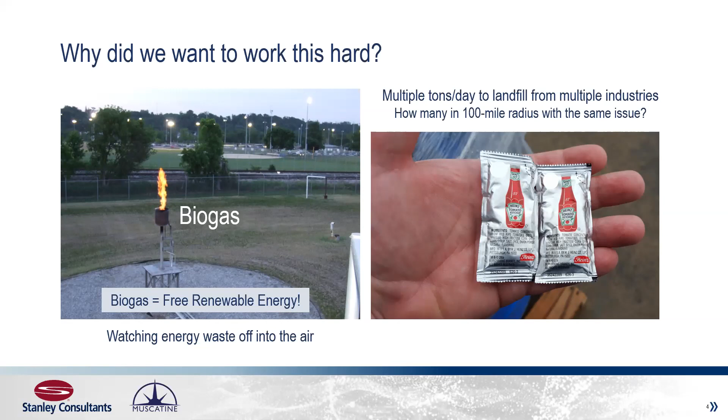So we said, what are we going to do with this stuff, and how are we going to convert this into energy and make more gas? Because little Muscatine really wasn't making enough gas to entice anybody to run an energy program, and we didn't have any money or grants for that. So we needed more gas to generate private funds for a program like this. Back in 2012 or so, renewable natural gas for vehicle fuel was all the rage, and natural gas was going to be the cure for our climate woes. That's kind of where we were headed at first.

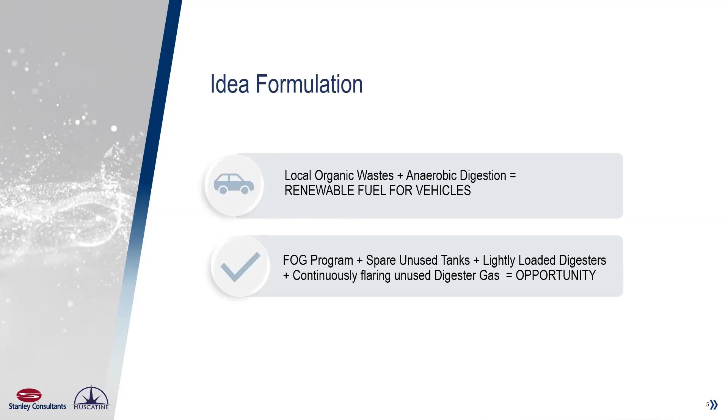We had a lot of things set up already. We had a FOG program, and some spare infrastructure we could use. Our digesters were really lightly loaded, running 45 days. So we thought we had lots of capacity, and the flaring told us we had a lot of opportunity here, but we needed more gas. So where do we find the fuel for our digesters?

It turns out food waste was a really key target for us here in the Midwest, particularly where we have a lot of food manufacturers and organic waste. So we said, let's find that 40% of food that isn't eaten, all that waste going into landfills, and take it into the plant to convert it. There are some places doing this on the coasts, in New York, California, and elsewhere, but not a lot was happening in the Midwest, so we had to look around and find where we were going to get our new fuel for the digesters.

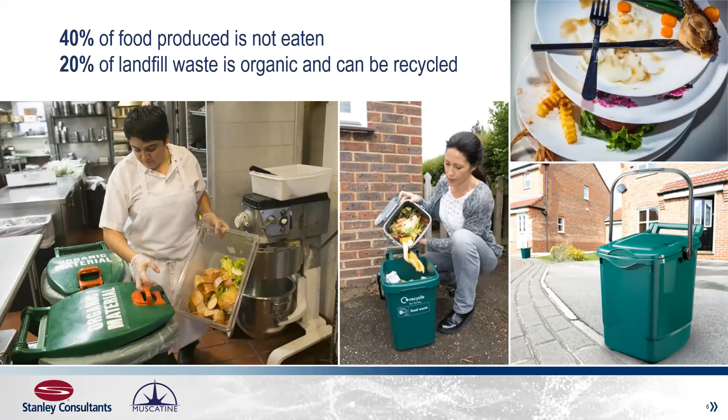So we used the EPA's food recovery hierarchy, as you see here, in building our program, asking what do we do since we're only the fourth best option for this food waste. When it says MARRVE up there, that's Turn Food Waste into Energy -- actually the Muscatine Area Resource Recovery for Vehicles and Energy program that we started. It actually targets all three of those higher options first before we get to the industrial side, but of course we're focusing on the industrial side today. That's kind of where we are since we discovered this massive amount of food waste out in our communities and our region.

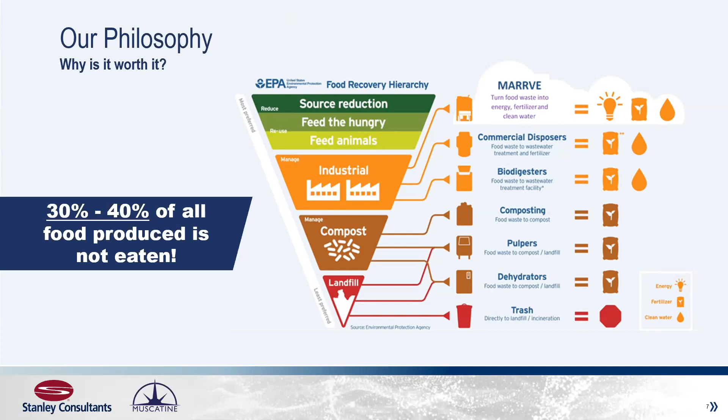So Muscatine is building our sustainability efforts here. We have a program where sustainability drives our programs in the right direction, linking the three aspects of sustainability -- people, planet, and prosperity -- to find those key projects. And the project we did focuses in on that so well. It's just a perfect match for all of these things.

And the community really embraced it. I went through about four iterations of proposing this to city councils, telling them it wasn't a guarantee of any kind, and they still said, we want to go for it, we want to be that kind of a community. That really speaks to our level of appreciation for sustainability in our community.

There's lots of benefits to this, and this is how we sold it to the council. Diverting landfill space -- since we're a regional facility, we're not just saving space in our own Muscatine County landfill, but landfills around the region where all this material was going. When you do that, you lower emissions from those landfills, since even gas-capturing landfills are generally pretty inefficient at it. So the more organic waste you take out of a landfill, the better for methane emissions. Of course, this is also a good service for our community, since there was a lot of need and requests for this kind of service that wasn't being met.

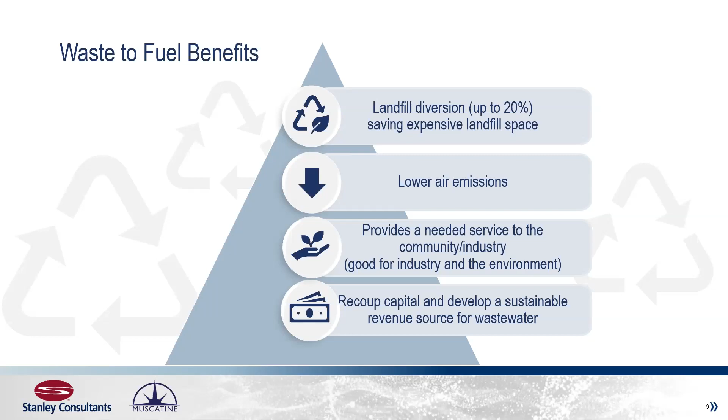So again, when we first started looking at this, renewable natural gas was all the rage. The renewable energy credits you could get when injecting it into the pipeline were really touted. There were huge advances in renewable natural gas and CNG vehicle engines, and that was kind of where everybody thought we were going to be going. Of course, I think we've shifted from that a little bit, but this is where we started.

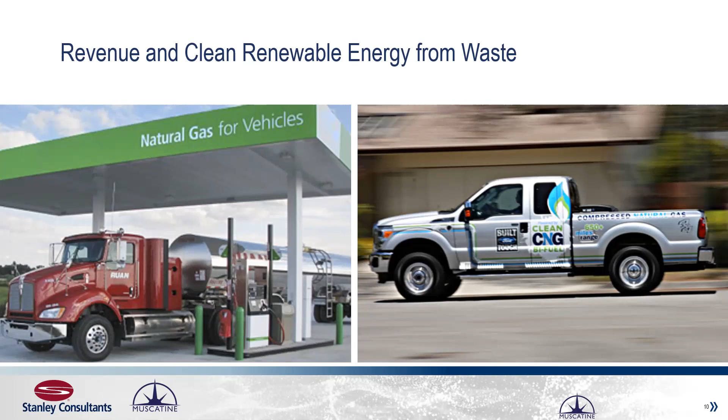Once we figured out that vehicles were not going to be all natural gas, that they were actually going to be electric, we said, well, what are we going to do with our gas, since we want to get it into vehicle fuel and energy, since that is how we generate the renewable energy credits for the revenue we needed to make this project worthwhile. So the CNG delivery mode was kind of pushed.

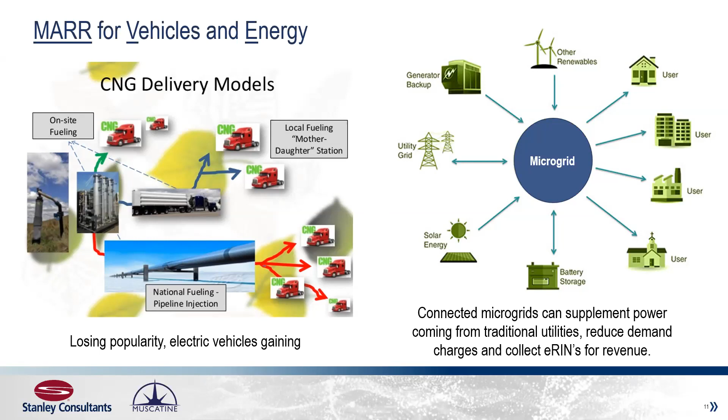Now we're looking toward the microgrid scenario you see here, where we can generate power, store it, and push it back into the utility grid to realize what hopefully will become an e-RIN. If you know what RINs are, they're renewable energy credits you can sell on the open market. They promise us an electric RIN is coming—it's been available since 2007, but none have been issued by the EPA. They're working toward that now, so hopefully it becomes a reality soon.

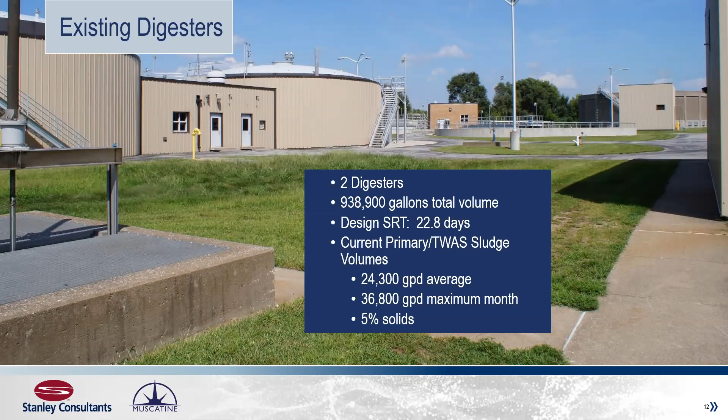They receive a mixture of primary and thickened waste activated sludges, about 24,000 gallons per day average and about 37,000 gallons per day max month, at about 5% solids for those feedstocks. At the time of the initial studies, the city was taking in about 16,000 gallons per day of FOG and high strength waste, processing it through the liquid train, which isn't really ideal for handling concentrated feedstocks. They were getting a gas yield of about 56,000 cubic feet per day average, though with a lot of variability, equating to about 14 cubic feet per pound of volatile solids destroyed.

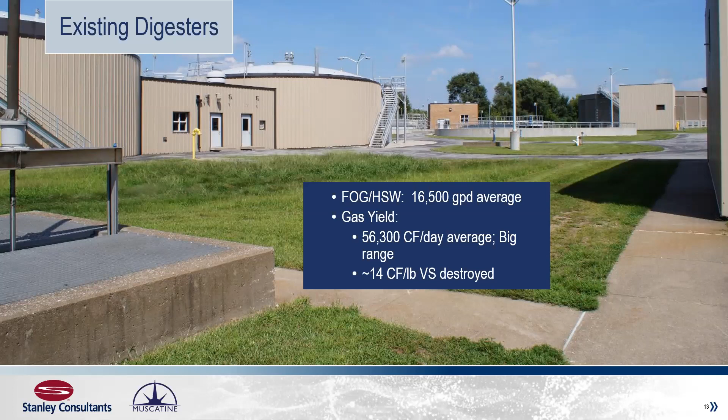The facility also has 4 older idle digesters that are part of a conversion. This used to be a pure oxygen plant back in the 70s. In the 80s, the loads went away and they converted it to aerated activated sludge. When they did that, because of the drop in loading, they were also able to idle a sizable part of the aeration basin and partition part of it into 4 rectangular digesters. They need rehabilitation work, but that's another 2 million gallons of potential digestion capacity available.

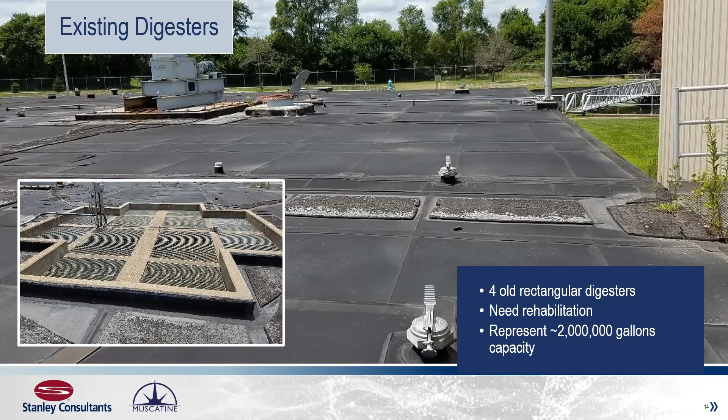Looking at the plant itself, energy use and biogas production at the time: 30,000 cubic feet per day average would meet the digestion, building, and process heating demand, with a peak of about 80,000 cubic feet per day needed. This is equivalent to heating about 90 homes per year. In winter we have a lot of demand for biogas for process and digester building heating, but in summer that demand drops way off—everything's warmer—so we accumulate quite a bit of gas during summer months, and it's all flared off currently.

Natural gas usage was about 3,650 therms average per month, with a peak of over 8,000 therms per month, and a pretty substantial cost of $3,300 per month, rising to about $7,000 during peak winter months. And that was back in the good old days when gas was below $3.50 a therm—whereas it's about $7.90 today on the spot market.

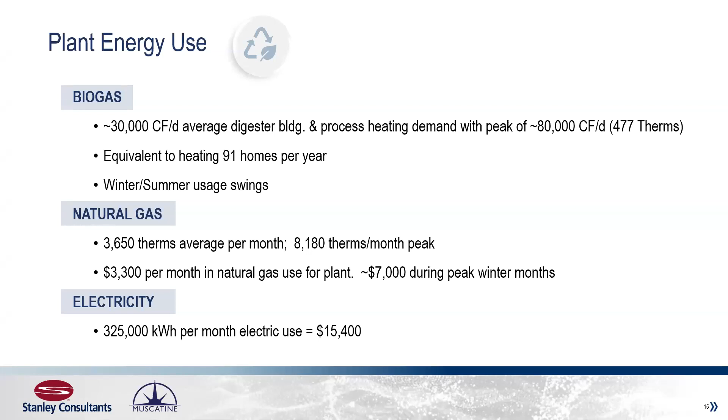Electricity usage was about 325,000 kilowatt hours per month, costing about $15,000 in electric usage per month.

Feedstocks: when we start thinking about co-digestion and biogas generation, what kind of feedstocks can we bring in? We want concentrated, ideally liquid material free of debris. The city also has a FOG program for restaurants, delicatessens, bakeries, and any place using a lot of fats, oils, and greases in cooking. They wanted to be sustainable and provide that service to local restaurant establishments, so that was one of the key targets for this program. Then there's liquid organic waste, which can be a number of different things.

A lot of liquid waste comes from food processing, but we also get solid organic waste, as John was talking about - ketchup bottles, ketchup packets. There's all kinds of organic material that is packaged but eventually not used for its intended purpose, and it ends up in the landfill. Past-prime vegetables, expired produce, expired canned goods from grocery stores, cafeteria waste from schools - these are all examples of organic materials that can be recovered and actually slurried and digested.

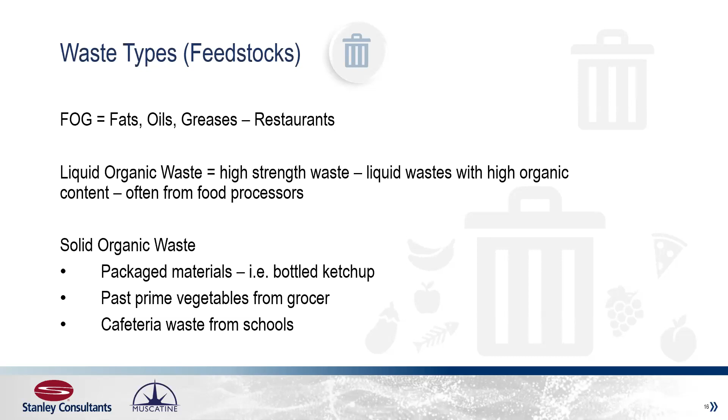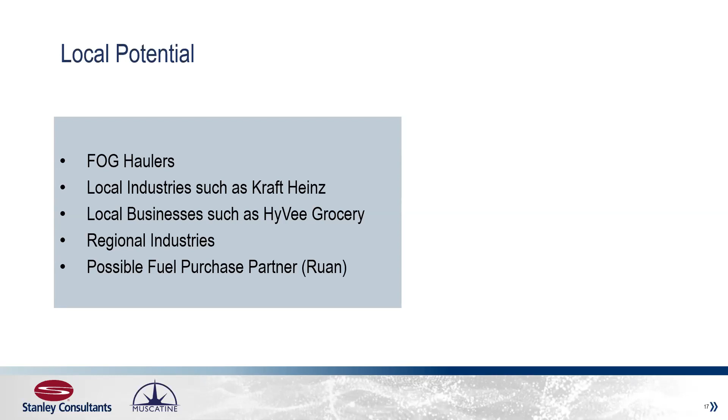So we look at the local potential - the fog haulers, local industries such as Kraft Heinz that John mentioned, local businesses such as our grocery store chains in the area. Hy-Vee is one of the big ones. Regional industries too. And as John alluded to, we're thinking we'll use this for compressed natural gas for vehicles. So we're looking at how we can use that readily - Ruan, a trucking company, has quite a fleet of compressed natural gas trucks and would be a potential partner to participate in this.

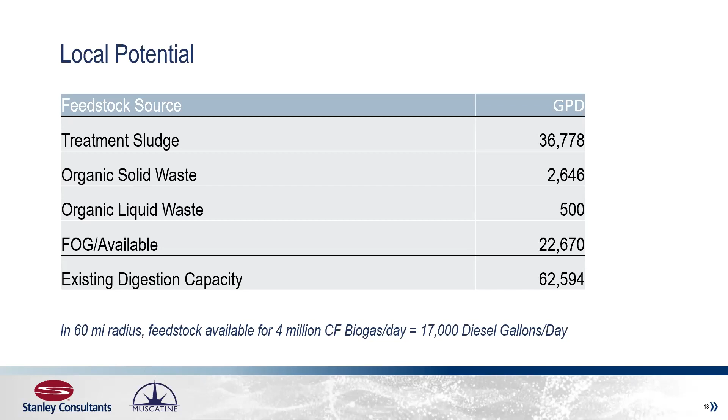So we look at our feedstock sources and our potential usage or availability of capacity. Treatment sludge, we talked about that already, is 37,000 gallons per day maximum month. At the time of the initial studies, the organic solid waste, or total organics, was about 3,000 gallons per day. And then fog and available capacity that we'd need to reach full digestion capacity in the two newer digesters is about 23,000 gallons per day.

So we embarked with the city and a sub-consultant, Eco Engineers, on a biogas waste shed study. That's looking at what kind of organic feedstocks are available within a 60-mile radius. That encompasses quite a number of industries, including ethanol and biodiesel industry, a lot of food manufacturing as John talked about, and the material that goes to landfilling that we identify as organic.

So this kind of breaks up some of the different sources. If we were able to capture and process all of the organic substrates within an hour of Muscatine, we could produce 4 million cubic feet of biogas a day, which would be 17,000 gallons of diesel equivalent per day. Obviously we're not going to capture and process all of that, but it gives you a sense of the scale of material that's out there.

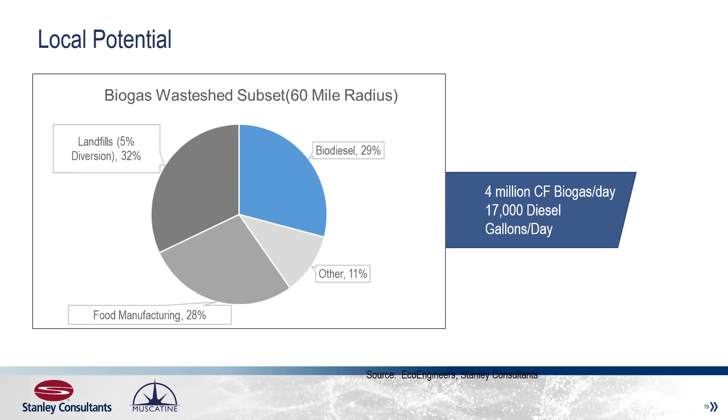So as we embarked on our study, we looked at low, medium, and high scenarios so we could start looking at risk and risk-reward possibilities. This is just looking at feedstock coming in - how much could we capture, how much could we process, variability in biogas production, and what kind of cubic feet per day of biogas we could produce.

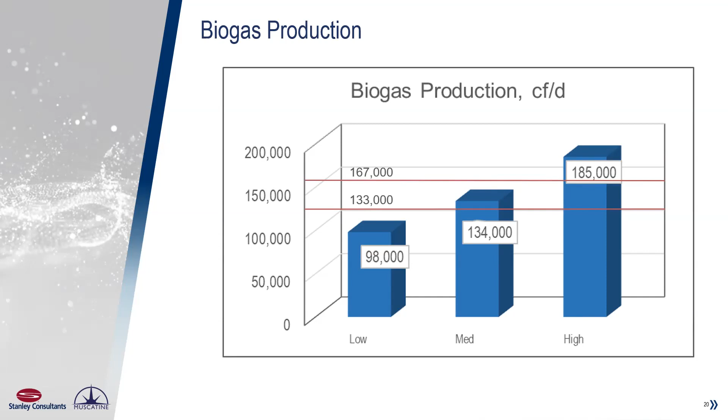On the low end, we're looking at about 98,000 cubic feet per day, and at the high end, about 185,000 cubic feet per day. The two red lines across the front of that graph, at 133,000 and 167,000 cubic feet per day, represent what the plant is currently achieving with co-digestion and the organic feedstocks they're bringing in.

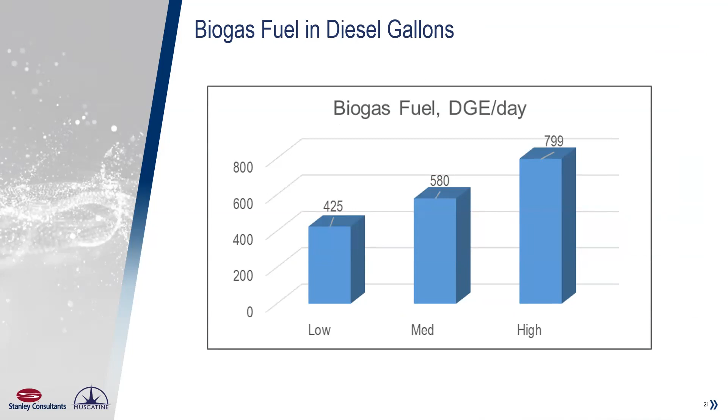Thinking in terms of vehicle fuel, we converted that to diesel gallon equivalents. This is 425 to almost 800 gallons per day, which doesn't seem like a lot until you start aggregating that over a year. As you aggregate that over a year, it becomes a pretty significant amount of fuel - 150,000 to almost 300,000 gallons of diesel a year.

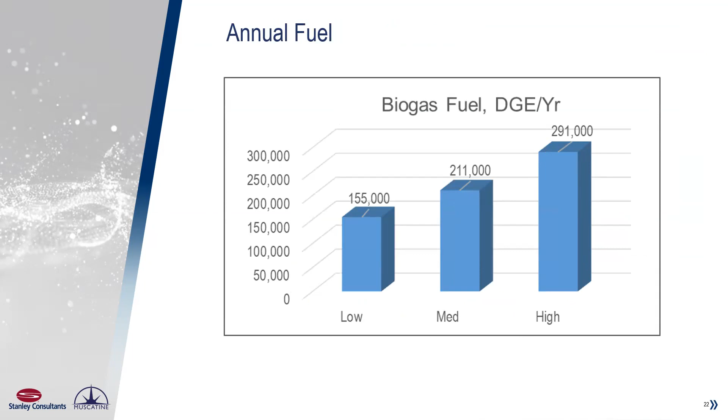We looked at a number of different ways of utilizing biogas at the facility. One was direct firing in the building furnaces - treating the gas and then piping it, which requires some additional gas infrastructure, a fairly low capital cost investment. Another is cogeneration of heat and electric power, which has been practiced at anaerobic digestion facilities across the country for many years. It's hard to make it all work number-wise from a capital and operational cost perspective, but when you start factoring in renewable energy credits, that starts paying down the capital cost and making it pretty attractive.

As John indicated, now we're thinking about microgrid management and these e-RINs, the electric power renewable energy credits that we hope to see come out of the EPA soon. And then compressed natural gas for vehicle fuels, that was number 3.

The concern there, of course, is we produce this gas and have to store it for some period of time before it's put into vehicles for use. So how do you manage that inventory of compressed natural gas?

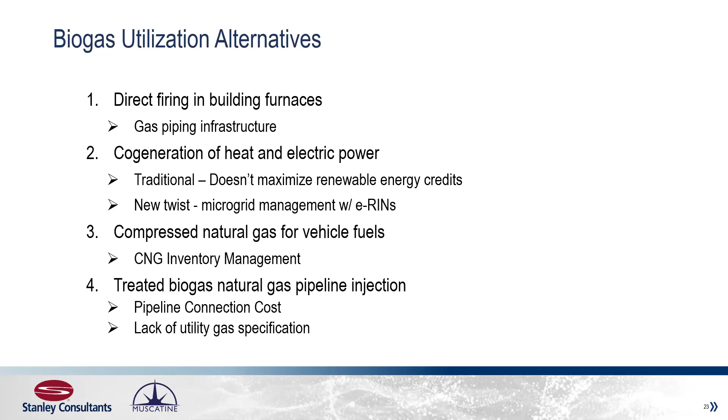So us being engineers, we figured the numbers, we estimated capital costs, we estimated annual costs, savings and revenues, and kind of looked at a 10-year present worth cost. Out of these different options, the compressed natural gas for fuels really was the one that would show a positive when all the numbers were assembled.

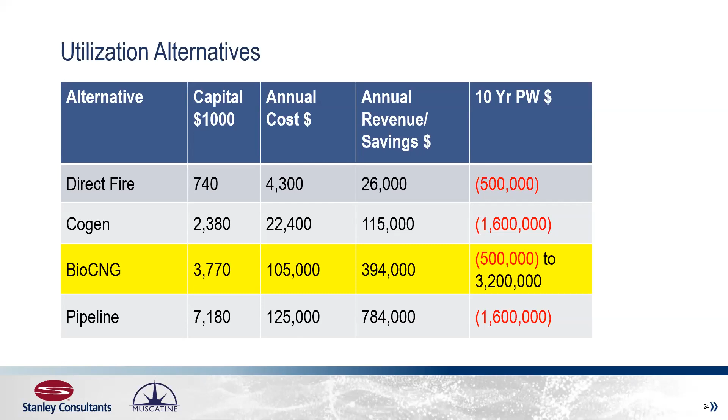So looking at the overall estimated cost, the phase 1 receiving facilities that we're really going to focus on today, that was estimated at $2.5 to $3 million. The phase 2 digester renovation was $1.6 million, and then the bio-CNG vehicle fueling facility was estimated at $2.5 to $3 million. And then we have operating costs that we also estimated for the study work.

For the phase 1 receiving, which is really the focus, we were looking at $60,000 to $90,000 a year in operational cost.

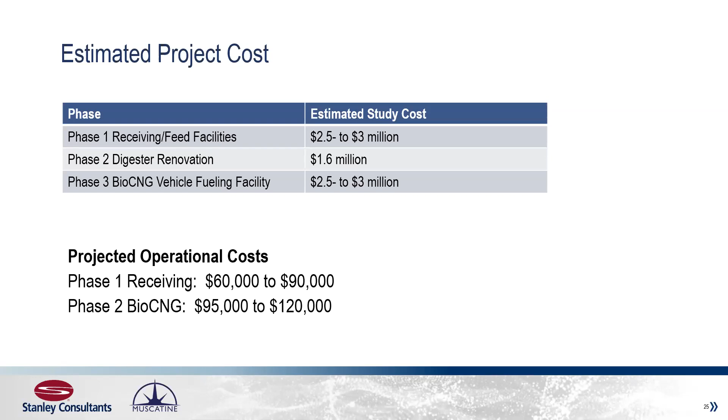And we look at potential revenues for the project. Tipping fees is an important aspect of this, and actually the phase 1 receiving facilities, our efforts looking at that from a return on investment standpoint was really focused on just funding out of tipping fees, because we weren't sure if and when the biogas utilization component would be capitalized and funded and then implemented.

But then moving forward, if we take and use that biogas that we're producing, we have a fuel value. And then we also have these renewable energy credits. Basically petroleum producers are paying dollars to get these offset credits. It's a federal program, but if you can get into the pipeline and call it transportation related, then you can get other states participating and kind of stack these credits, and it can be a substantial revenue stream.

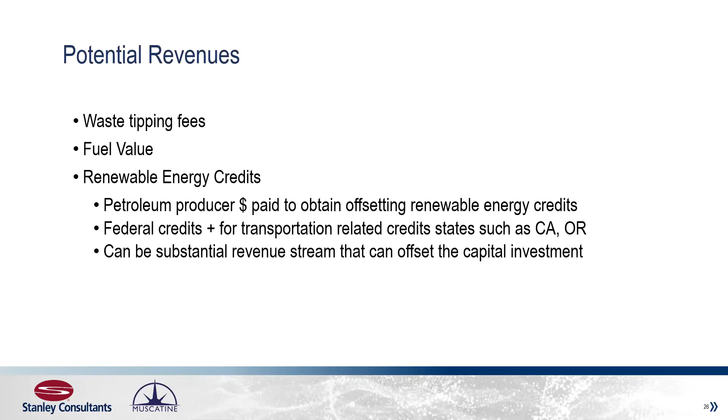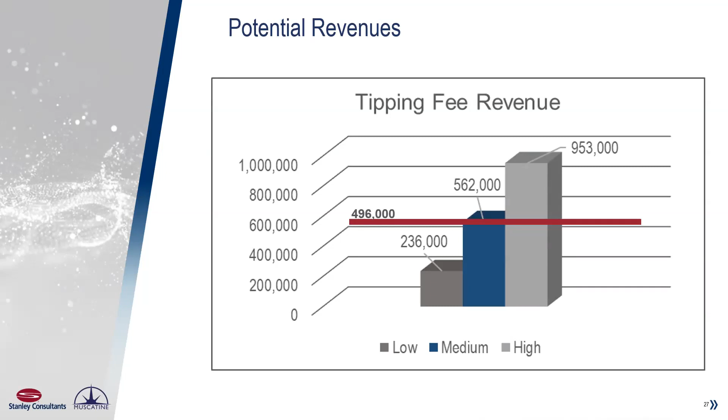Okay, so this is talking about tipping fee revenues. What we're looking at here is a low of about 230,000 to a high of 950,000 based on the volumes that were anticipated. Currently the plant, as of this last year, was bringing in close to $500,000 a year in tipping fee revenue. So that's kind of right there at that medium category for the scenarios.

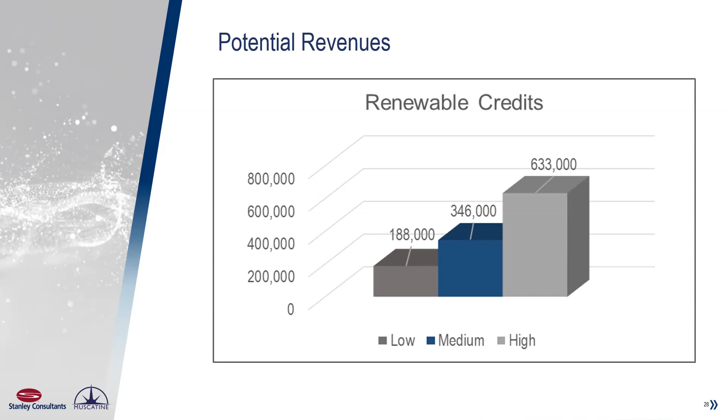This is just looking at the renewable credit dollars. We're not going to dwell on that a lot, but it does illustrate that there's some substantial dollars there. They are variable, which we will talk briefly about.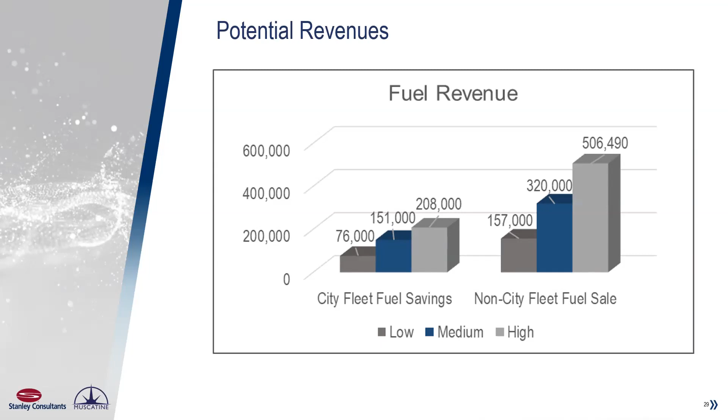And then we stack all that together, and you can see that the total revenues could be pretty substantial if the project was implemented to all three phases, the biogas was being beneficially reused, and we were getting renewable energy credits.

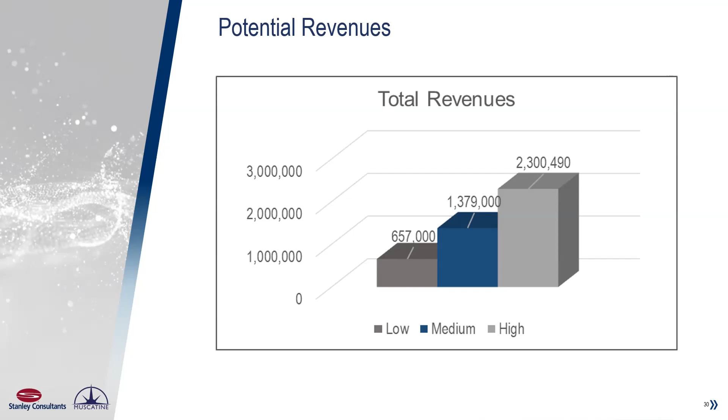So we kind of looked at what kind of rate of return are we looking at for this municipality that's looking at this. Their timelines and time horizons are a little longer, but they don't want to end up investing in something where the equipment's going to wear out before they get some type of return.

So we did a low, medium, and high, and really looked at phase 1 and 2 for the utilization. As you can see, the high and the medium delivered under 10 years, which is kind of a marker that we're shooting for. But even the low end, we're delivering in under 20 years, theoretically, before equipment would wear out.

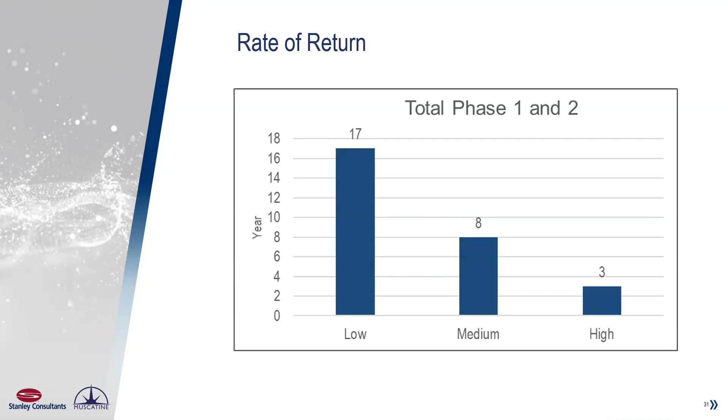So I wanted to speak briefly about some of the risks associated with a project like this, and we have to recognize and consider that in our thinking. One risk is that you may not capture the organic waste volumes you thought you were going to capture. That hasn't been the case for Muscatine, but as competition perhaps blossoms and other entities embark on this type of endeavor, there may be competition for that organic feedstock, so you could see lower volumes in the future.

On the fuel side, for compressed natural gas vehicle fueling, what happens if we don't have the type of fuel consumption and sales we were anticipating? And then for our tipping fee rates, we set a tipping fee kind of associated with the solid waste tipping fee, but if we have competition from other facilities for these same feedstocks, perhaps our tipping fee rates would drop and that revenue would decline.

And then the renewable energy credits - what is that value? That value fluctuates, it's a marketplace, and those values can be phased out. Also, it's a government program, so government programs do sometimes end. So there's some risk associated with fully relying on those RIN values.

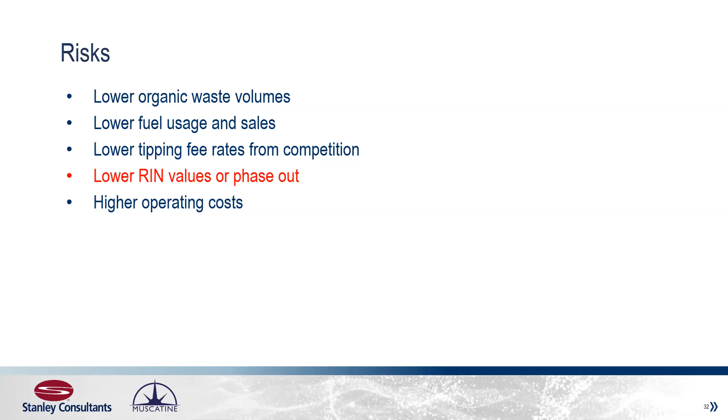So I'm going to turn back over to John. He's going to talk about some of the exploration part of our project.

So this is the fun part. When we started looking at all the food waste that was in the area, we said, well, what are we going to do with this? How do we get the ketchup out of the packet, as it were? So we started looking around, and I had a guy in the back who vended - he had the Muffin Monster contract for Iowa. So I said, can you bring me a Muffin Monster? We're going to set it up sideways, and I'm going to start dumping stuff through it to see what happens.

So we had it set up on an old pump pedestal, and we started throwing things through it. We actually put several screens on the bottom to see if we could capture that trash and organics coming out the bottom. These are the kind of things we did when we first started out, just to see what would happen and start exploring those alternatives.

But of course, that's a pretty inefficient way to do it. This is a much more efficient way to do it, with the turbo separator from Scott Equipment. There are several manufacturers of depackaging equipment out in the world - most of them are made in Europe. This one actually happens to be made in New Prague, Minnesota. So being in Iowa, we really liked that they were close. They're a Midwest company, and they're an American company as well, so for parts and things like that, we were really excited about that opportunity.

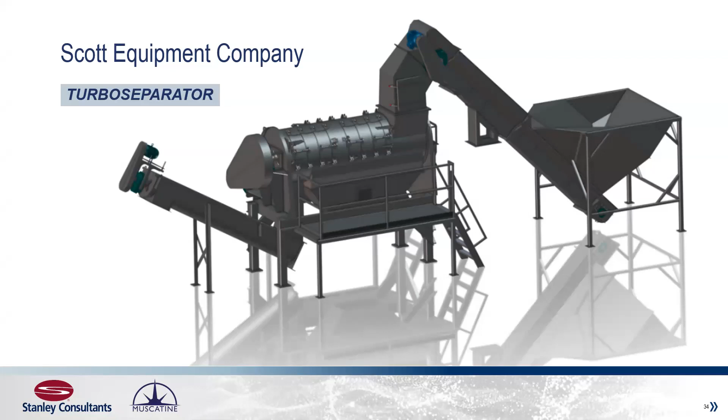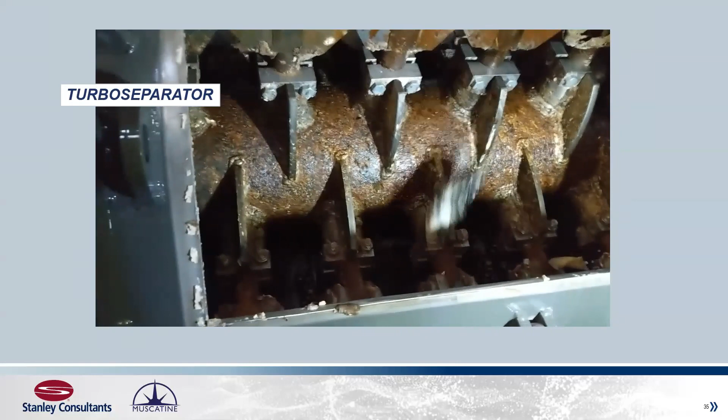So this is what one of those looks like on the inside. If we look at the barrel part of it, it's basically a hammer mill operation where you see the shaft with the paddles attached, and those paddles can be angled in certain directions depending on the product you're running - you can change those. If you want to keep the material in the machine longer, you angle them straight; if you want it to go through faster, you angle them more to get that desired result. These will actually rotate at about 400 to 800 RPM.

This is typical material that we get - canned products. That's the cans as they show up at our plant, that's the material being dumped, the organic that was inside the can. And then the can itself looks like it's kind of just a mangled piece of aluminum - it's not shredded, not chewed up, but just kind of mangled a little bit there. But that's still very recyclable material in that form, so we try to do that as much as possible - recycle the packaging as well.

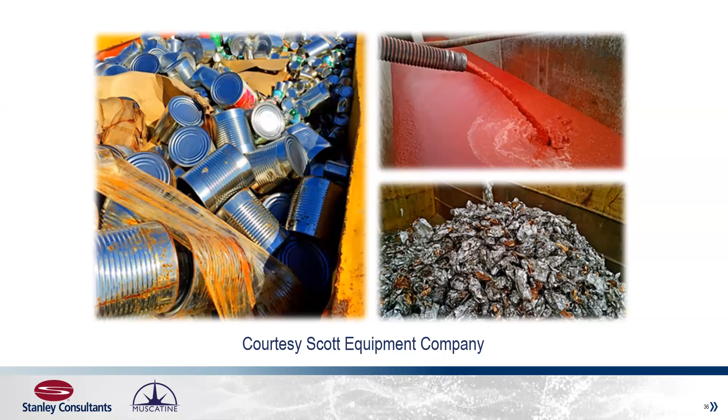As we explored and looked at model facilities, which there are very few of across countries, we started contemplating what it would look like here at the Muscatine Water and Resource Recovery Facility.

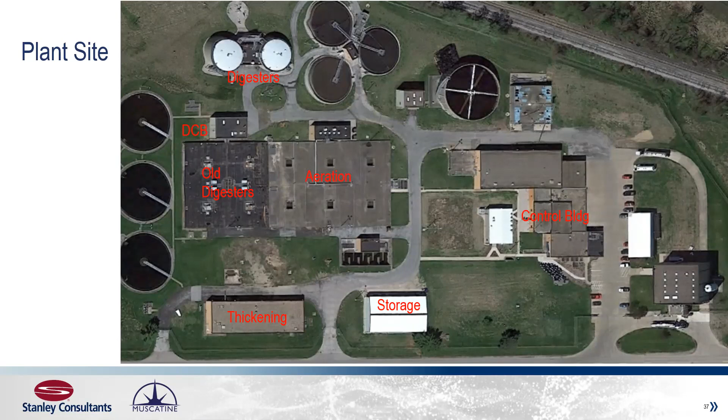We first conceptualized what we needed to do here to receive these organic wastes. We were looking at the area just south of the idle digesters for that proposed receiving facility. The initial thinking was, hey, we've got a once-through drive with two entrances, an entrance and an exit, and we could site it there, and everything would work great. We'd have some area for paving to back into our tipping floor.

We want to manage this material so we don't disrupt our anaerobic digestion process. So we need to inventory our feedstocks, homogenize it, and meter it into the anaerobic digesters to minimize disruption of the digestion process itself. So this was kind of our initial layout.

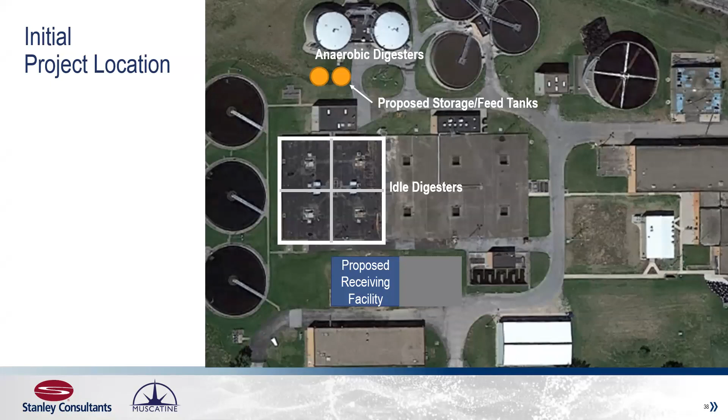We developed a receiving building concept here. This is just a rendering of what that looked like. We had a layout where we took our liquid waste receiving from the trucks driving by off the bottom of the page—they'd hook in, discharge their load, go through a rock trap, a bar screen, and into a pump well basically below the turbo separator. That's the big circle, the pump well.

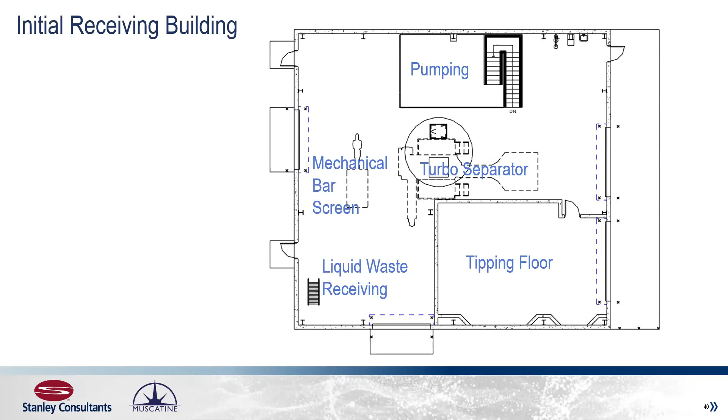And then we could pump out of that to another area of the plant for inventory management. The tipping floor was where we were envisioning bringing in the containerized organic waste, the cafeteria waste, etc., to run it through the turbo separator.

This is a cutaway illustrating some of the facets of that building. Here you have the two feedstock inventory management tanks, the high strength waste storage tanks, and associated pumps and piping for keeping them warm, keeping them mixed, and metering them into the digester.

Some of the challenges of this project include the limited number of comparable facilities. John went and looked at quite a number of them across the country. There are very few that are actually doing decontainerizing. There's a lot of folks taking FOG or liquid waste, but not very many doing the decontainerizing work that Muscatine is doing.

Some of the concerns, of course, are the logistics and the trucking. For the truck folks, time is money. So they want to be able to get into a facility, unload, and get out. If you have lots of trucks waiting in line, a slow process to get unloaded, that type of thing, they might lose interest in your facility.

And then how do you right-size this? How many trucks are we going to get of material a day? How are we going to stage that material? What size tank should we have? What's our peak truck traffic day versus average truck traffic? It's a lot to consider.

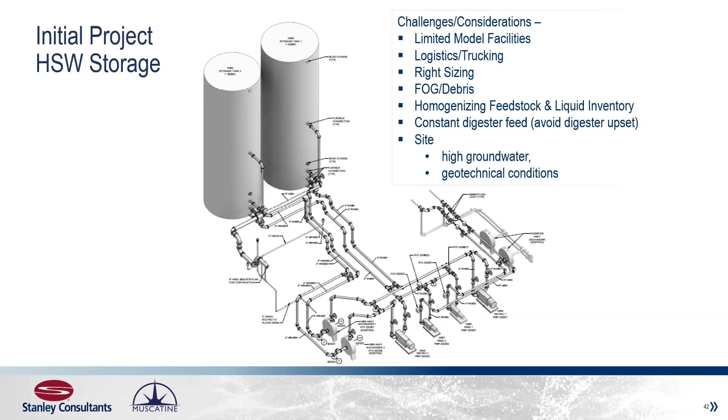So we changed some things around from our initial concepts. We had a high estimated cost for that approach, along with concerns about how to handle truck traffic and what happens if we need to expand utilities in the area. As a result, we ended up changing the location. We eliminated the new storage tanks, repurposed an idle tank on site, and looked at using the existing storage building.

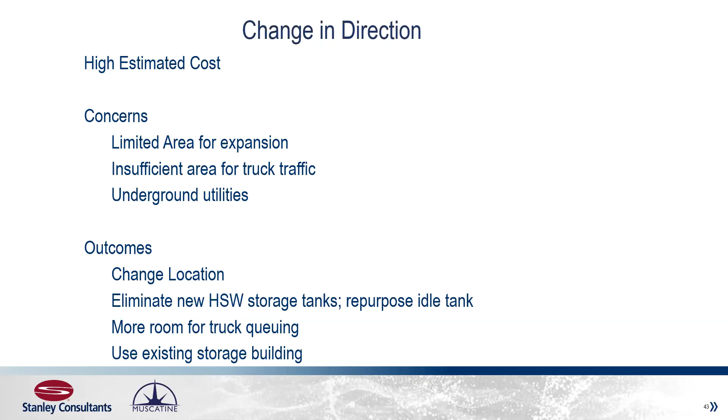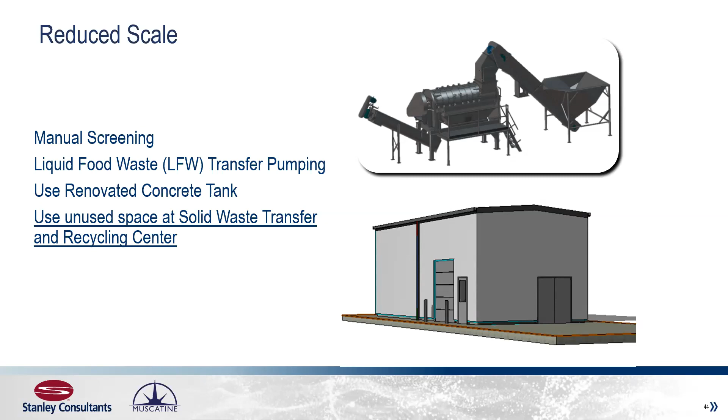That has really been a silver bullet, silver lining to the clouds, so to speak, for us, because it's ideally suited. Here's the transfer station itself, and on the left-hand side where that MORC sign is, that orange sign, that's actually the recycling portion of this facility, and it's ideally situated.

We have loading docks here on the left-hand side of the picture where we can bring containerized organic waste in. We have a drive-through bay at the top of the screen so we can bring our liquid haul trucks in. This is how we oriented and organized this for the city, with the turbo separator there in the middle, and then a tipping floor with a push wall so they could bring in cafeteria waste and other types where it's easier just to dump it and scoop it into that auger in the middle of the screen and auger it up into the turbo separator.

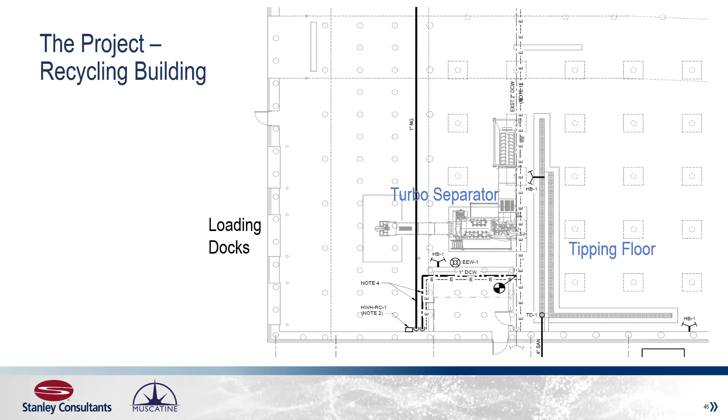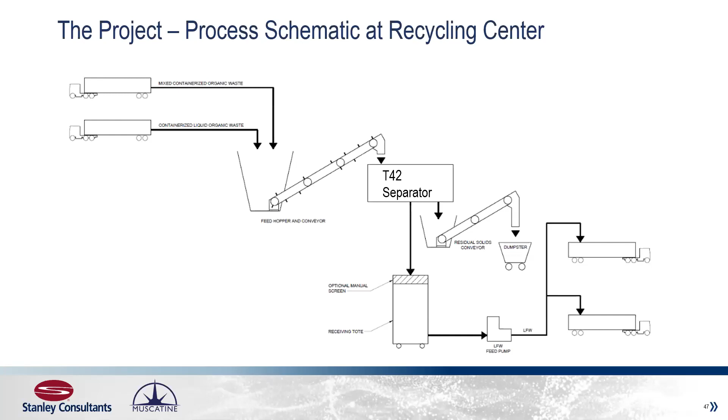So this is just a quick little schematic of the process. We get our material in by truck, put it into the feed hopper, it goes up the conveyor into the separator, and then we have our residual materials that come out in a residual auger that ends up in a bin or a dumpster. And the liquid gold, the organic goo as I like to call it, comes out and drops into this receiving tote. We can do some screening there if need be. We pump out of that tote into tanker trucks to haul over to the water and resource recovery facility.

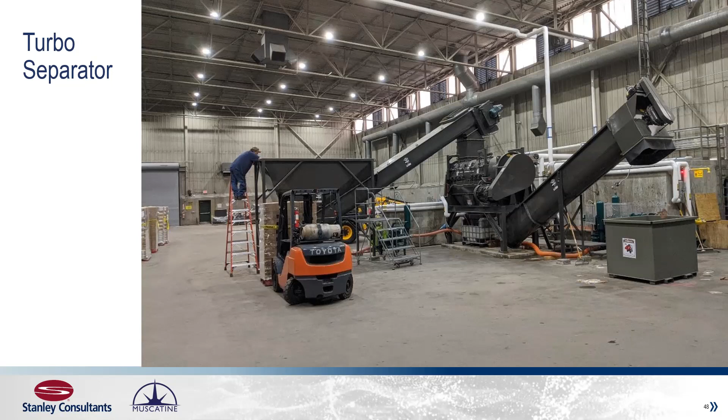Yeah, we can go next. So this is an example of some of the material showing up — in the upper left-hand corner, all those tiny cans are little cans of Vienna sausage made by a local manufacturer not too far from here. They send them to us without even a label on them. They just separate it out by a hardwood flat, and our staff dumps them on the floor, and we use our end loader to scoop them up and run them through the machine. So those are one of those opportunities where we have to actually capture the packaging for recycling as well.

It's really kind of a neat concept. Below that you see the lunch meat you've probably seen in local grocery stores. We have a large Oscar Mayer plant just north of us that makes all this shaved meat. It ends up sitting in a warehouse too long, or they found something wrong with it in quality control, and they can't sell it — it can't be used for human consumption. So they bring it to us, and you can see the machine — that's after it's been depackaged. That packaging is not destroyed at all. It's just opened up, the meat comes out, and the machine works excellently with material like that.

Next to that is dog food. We have several large pet food manufacturers in the area as well, and they get stuff that's wrong with that material. I don't know, they find metal in some of the batches, and so they just say, hey, we can't sell any of this to protect the pets. So they say it's better for us just to take out entire yards of this stuff, and we end up with truckloads of palletized and packaged dog food and other snacks.

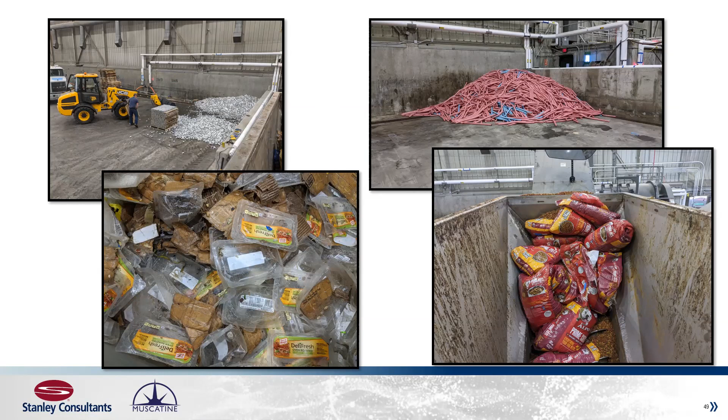So here's a little video showing how the material really works through the machine. It's kind of a fascinating procedure. This was one of our first weeks in operation.

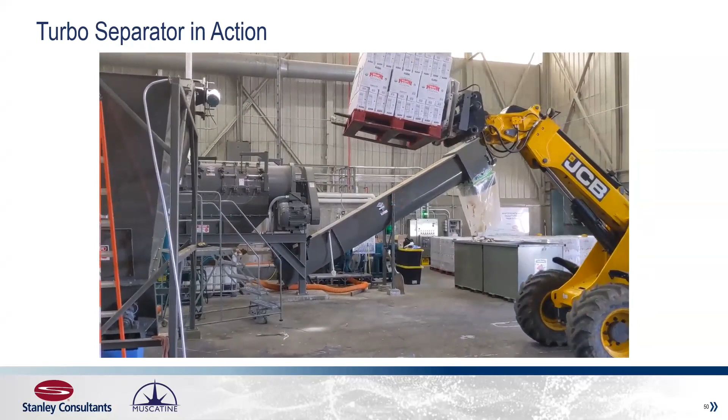So our lift operator here is going really, really carefully and slow. These guys work much quicker now than they did when they first started, because this was all kind of new for everybody. Nobody really knew how this was going to work or how it actually operates.

But we found the equipment that we needed. We found the rotating fork mechanisms and everything else we needed to facilitate getting that material up and into that hopper, and it's kind of some unique stuff that is out there for that. The telescoping arm on the end loader was really key for us as well, instead of just a straight end loader, so that we can maneuver that around to grab other things and use it actually as a platform to work on the machine as well. So there was a lot of advantages to that.

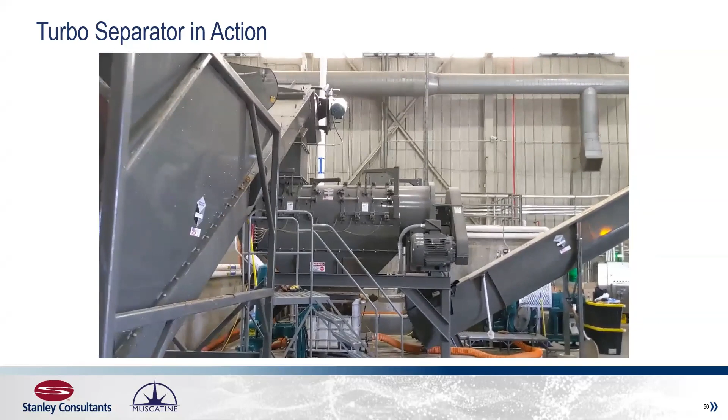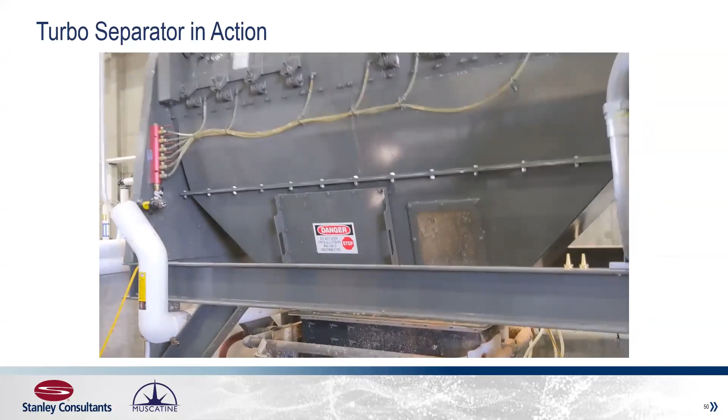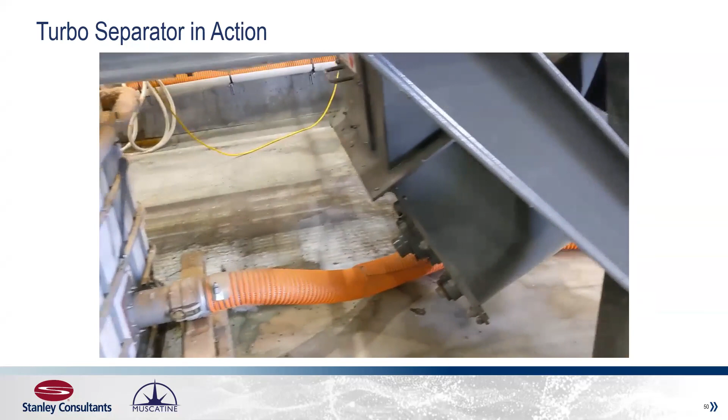So that's milk that came from Costco. It actually was still all palletized. We dump it straight into the hopper. Twin augers take that product up into the machine, and then the paddles break open the boxes and the gallon jugs that are inside of the boxes. You see the milk coming out the bottom, and it's then pumped out of that tote and into the truck using a piston pump that's sitting right back behind there.

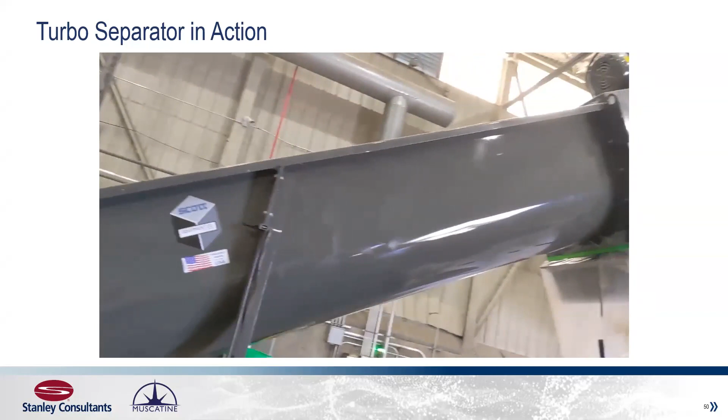And then the trash has another auger, a single auger, that actually lifts that trash up so that you can dump it into a waste container here, which we then take directly over to the transfer station, which is in the building right next door, which has been an incredible advantage for us as well. The trash transfer is very seamless and easy, because that is one of the biggest things we found, is that you end up with lots and lots of trash in a single day. And without having the advantage of being able to consistently remove that trash and bring back new bins, we would quickly fill up with lots of roll-off dumpsters and things like that.

Yeah, I think the debris quantities have been quite amazing. Debris quantities were much larger than what we'd expected.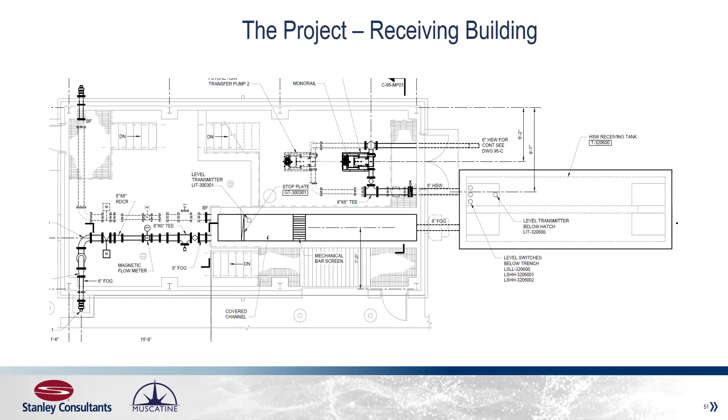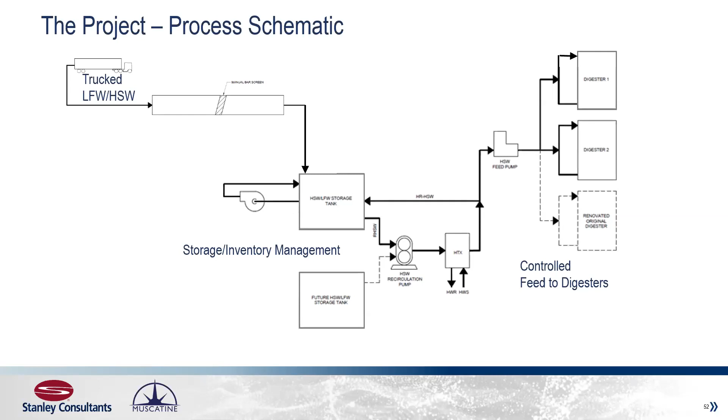And then at the treatment plant, here's kind of the process where we have our trucked liquid food waste, high strength waste coming in. It goes through bar screen, goes into a storage tank where we have jet mixing for that. And then it's transferred to the digesters, where we meter it into the digesters in a controlled rate.

Here at this facility, we have receiving in the upper right-hand corner. And what we have there is John's and his plant staff's own creation. I think they're going to patent it. It's their own receiving facility that they created for something very simple.

It allows the trucks, like in the photo to the lower right, to back up, connect their hose up, discharge into this, and then it just drops through manual bar screen down into that channel, and then gets transferred into the storage tank. The beauty of this is that John has the truck drivers actually patrol that bar screen, so they get up there and rake any debris out of there, so the next guy doesn't have a problem. It also makes those drivers think a little bit about what they're taking and bringing to this facility. So you're not getting these debris laden loads of material coming in.

And then the lower left, you see the skid loader there dumping some material through a hatch into the storage tank. That was original to the design. The storage bin area that they set up is not - that's something the plant staff came up with. That's for handling loose, drier types of organic material where we don't need to run it through the turbo separator. It's not containerized. So bins of dog food are an example where they're not bagged. You can drop that into the storage facility, and then they can drop it through the hatch into the tank and add some additional water if needed to slurry that up.

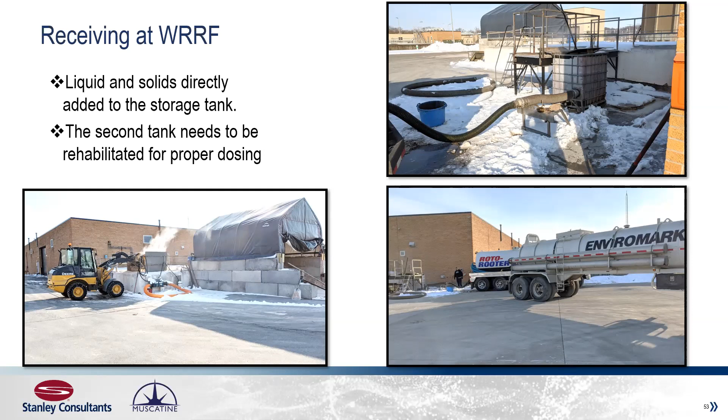So this is the storage tank that we repurposed. It had a different use at a different time and had gotten quite corroded over the years. It was sitting idle, so one of the things to put that back into service was renovating this corroded tank. There's quite a bit of work in cleaning out - there was some material in there, cleaned out the tank. Then we had to refurbish the concrete that was corroded along with some of that rebar.

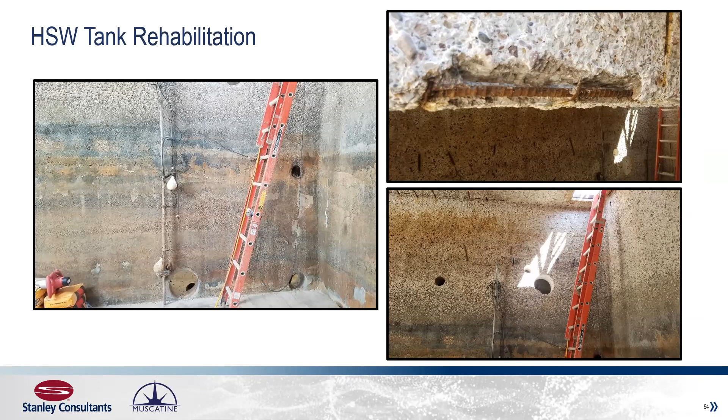So here's the end result in the middle photo there. You can see the gray coating - that's the refurbished concrete. The jet mixing piping and nozzles are on the floor of the tank. And then in the lower right hand, you see our pumps for both jet mixing and then transfer.

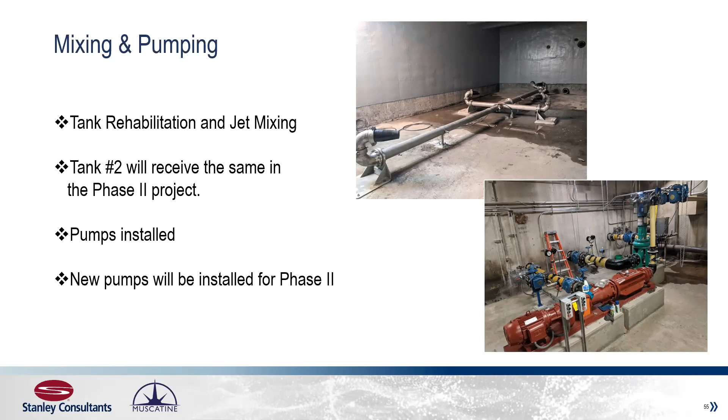Basically, we're going to take anything that people would eat, and that's kind of how we describe it. If it's a bare steak bone that doesn't have any meat on it, we don't want it because there's no organic component to that, so that'll be on the other side. We don't want paper. We don't want compostables. We don't want dead animals. We don't want animal waste. We don't want corn husks. Anything else like that we can take, we do.

And we fill that thing about sometimes twice a week, especially in the summer months when people have a lot of produce of their own and everything comes in. We really feel this has been pretty successful without hardly any marketing at all. This has all been word of mouth. A few things in some papers and things like that, but people don't read papers much anymore. So this really has come about just organically, no pun intended, within our community. It's been kind of neat to see.

We also have a company, this Green RU truck, that goes around and collects organic waste from several regional Hy-Vee grocery stores and things of that nature. So they've increased the amount that they can throw away. Back in the day, you had to have just an apple or a tomato or things like that were compostable, nothing with any packaging. Now they can throw away that bagged lettuce that turns brown and nobody's going to buy it, so they have to throw it. They used to just throw it in the trash. Now they can bring it to us because our machine will actually get that out of the bag.

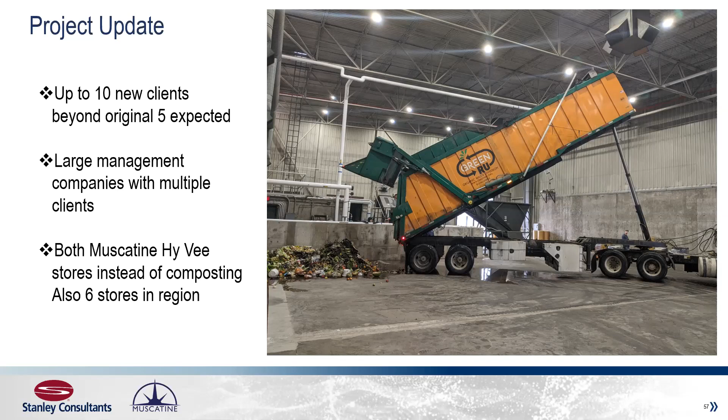We expected about 5 big clients. We've ended up with about 10, and now I could say honestly we probably have about 12 large clients. These large companies that manage them has been really the biggest boon to us. They have companies that actually do their recycling for them, so you find one marketing or management company and they have multiple clients that can bring material to us. That's been really the biggest thing that we've found worked to bring more material to the facility.

Okay, so just kind of running through some numbers. Again, this is kind of from the study phase, but also real results. In terms of tonnage, in 2020, we started up about May. That partial year, the plant brought in about 1,600 tons. In 2021, they brought in almost 2,800 tons. And then the goal is 4,000 tons a year, so we're steadily building towards that.

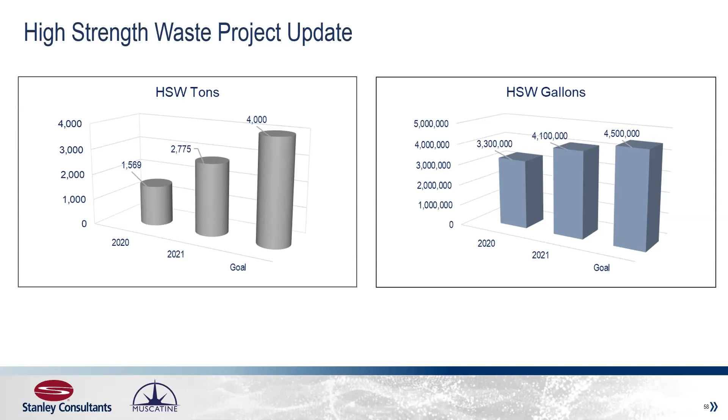In 2020, we had 3.3 million gallons of high strength waste that was processed. In 2021, that's gone up quite a bit to 4.1 million, with a goal of about 4.5 million gallons a year at current digester capacity. If we get our idle digesters up and rehabbed and going, we can bring in quite a bit more.

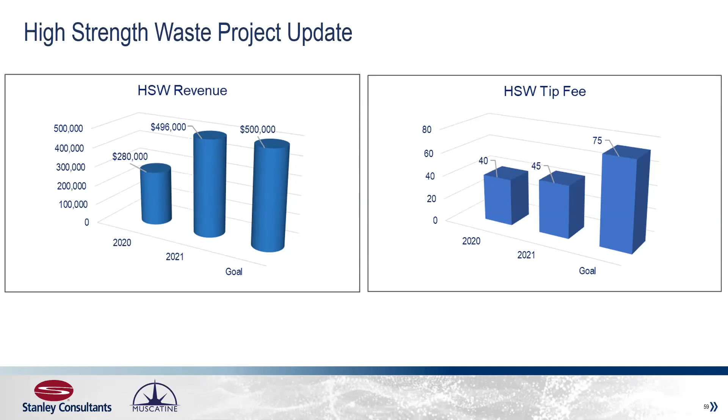So some of the operational tidbits here for receiving facilities. You really have to think about truck queuing and circulation, how you're going to move these big vehicles around your site. The receiving volume, how much are you actually going to get. Debris removal is an important aspect, especially if you're taking FOG and some of those other debris-laden streams. And then some people don't necessarily think about this too much, but how do you interface with the haulers? How do you bill? How do you administer that program? Weighing the material - we're very fortunate at the recycling center, we have an existing scale that we can use to weigh in and weigh out, so we know what the quantities and weights are.

And then, where you introduce these materials into your liquid treatment train or your solids treatment train - I'll just put a caveat, you need to be aware of anti-degradation. At Muscatine, we have a somewhat unique system where we don't bring a lot of liquid decant water back. The solids get land applied, they go to lagoons, and while we bring some water back, we don't bring that much back, relatively speaking. In a different situation, you might bring quite a bit of ammonia and other loading back from dewatering or from other aspects of solids processing that could impact your loading and may be a trigger for anti-degradation.

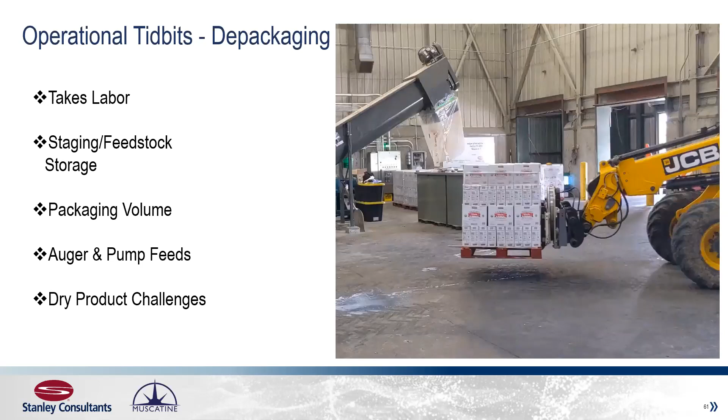And then the dry product challenges are really big too. You have to have a lot of water because dog food powder does not pump very well. You have to really mix it up into a slurry. So lots of hot water as well, because stuff gets greasy. There's lots of different things that we found we needed that we didn't really know before.

Of course, the material can be very abrasive. You can have all kinds of things that come in. You can have people that throw things in the bins behind Hy-Vee that they didn't know was there. That can really ruin your machine.

You have to balance the amount of stuff that you bring in, and this was really difficult for us to initially do. We had to find out how do we balance the amount of proteins and fats and other things, so we've kind of got a nice balance now. We know we can't feed straight dog food, we know we can't feed straight dairy. So we stage that inside our building and say, okay, we're going to run a little bit of this, a little bit of that, send that over on that day so we don't overload our digesters. Figuring that out was just kind of trial and error as well.

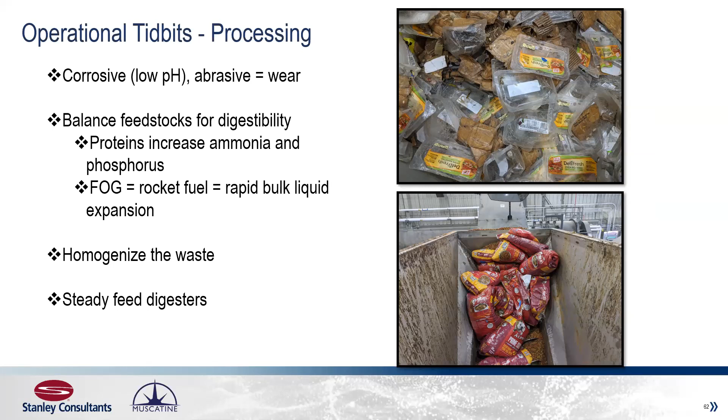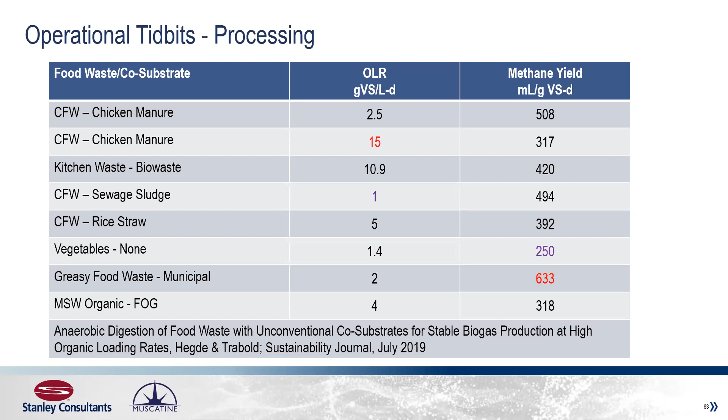I think this table just illustrates the variability of these types of feedstocks. OLR is organic loading rate, and you can see from these different feedstocks that's pretty variable. The methane yields are quite variable also. It's just kind of illustrating that.

The key is we want to avoid rapid bulk liquid expansion. People say, well, what's that? That's rapid gas production inside your digester that actually lifts your bulk liquid up. Some people call that foaming, but this is beyond traditional foaming. This is actually really expanding that liquid volume, and you get material coming out of the tanks, and this is what we're trying to avoid.

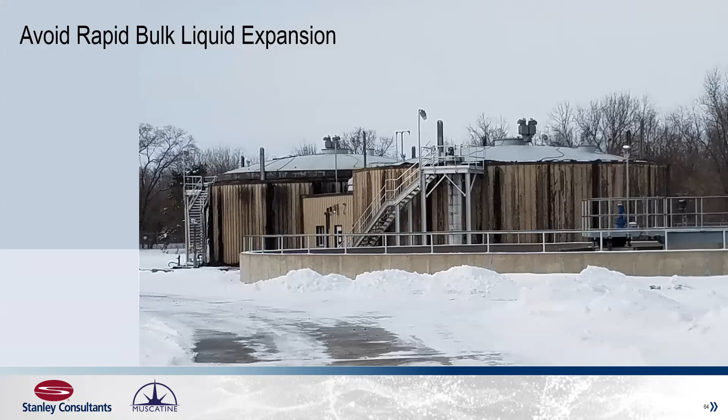I think we'll also close out a bit with some numbers. The capital cost actually was $1.8 million in construction. You add a couple hundred thousand dollars in engineering services on top of that, and then some refurbishment outside of the construction contract for the recycling bay that needed cleaning, light change out, and some other things done to really make it work well. Then various pieces of equipment, forklifts, et cetera, added quite a bit. So the total project cost actually was $3.2 million by the time you add all that up.

From an operational standpoint, I think you remember we estimated $60,000 to $90,000 annual operating cost. The reality is it's more like $350,000 to $400,000. We're netting about $130,000 to $150,000 a year right now, based on $500,000 worth of revenue. Between wear and tear, labor and some of the other things that have to come out of the revenue stream, that's kind of some accounting for you.

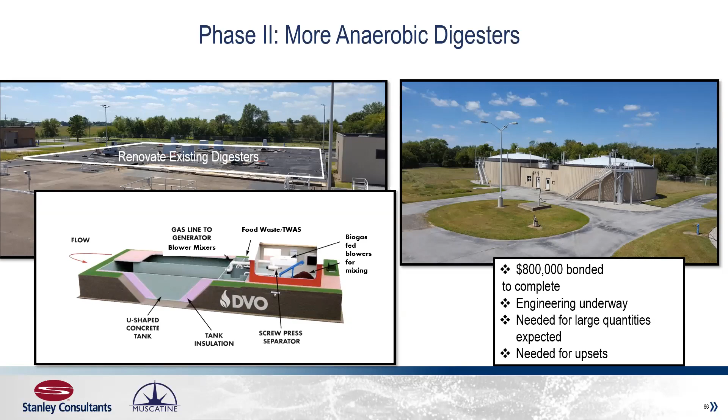And I love the Mork from Ork connection. I think I saw on Facebook that this week is some anniversary, maybe 50 years, when that TV show came out. So only some of the older attendees here are going to understand that reference, I guess. Robin Williams was introduced to the world by that TV show.